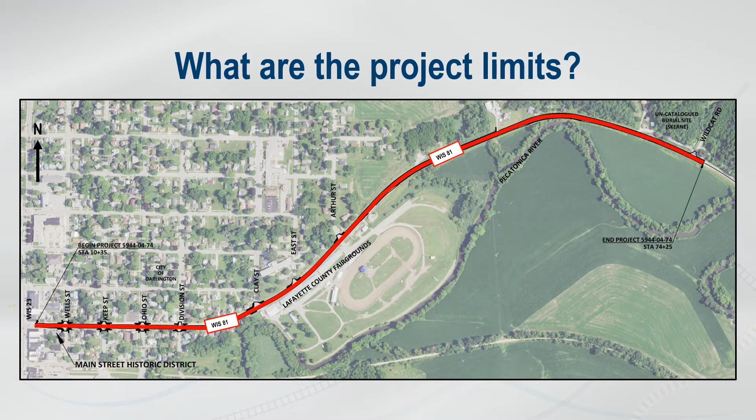The proposed project begins at the Wisconsin Highway 23 and Wisconsin Highway 81 intersection and heads east for 1.2 miles to the Wildcat Road and Wisconsin Highway 81 intersection. The anticipated construction for Wisconsin Highway 81 is currently scheduled to begin in 2026, with possible advancement of 1 or 2 years. During construction, Wisconsin Highway 81 will be open to two-way traffic. Shoulder closures will be needed for pedestrian curb ramp and guardrail improvements.

Milling and paving operations will utilize one lane of traffic in each direction with flaggers. Motorists can expect to encounter flagging operations one city block at a time in the urban portion of the project, and in the rural portion of the project, flagging operations will take place between Arthur Street and Wildcat Road.

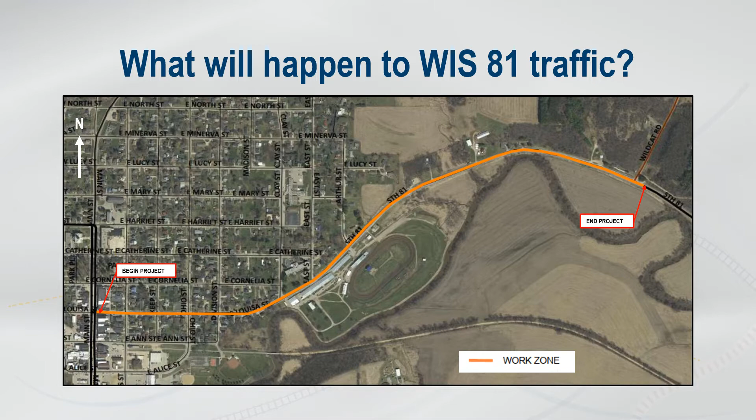There will be short periods of time when construction operations are occurring directly in front of the driveways. During these short periods of time, the property owner will need to park on a side street or use a secondary driveway if they have one. The Wisconsin Department of Transportation will contact homeowners and businesses in advance before closing a driveway.

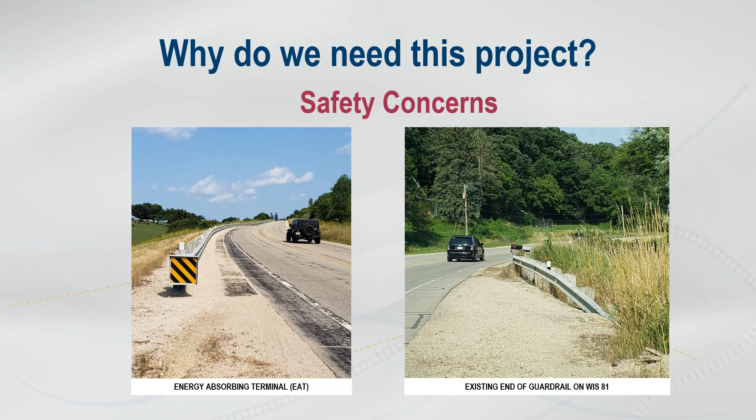Another reason we need the project is the pavement deterioration along Wisconsin Highway 81. The current pavement is deteriorating and has extensive cracking and rutting. Existing shoulder pavement is unraveling, with large chunks of pavement removed in various areas. This pavement deterioration not only looks bad, but also causes Wisconsin Highway 81 to have poor ride quality and presents safety concerns.

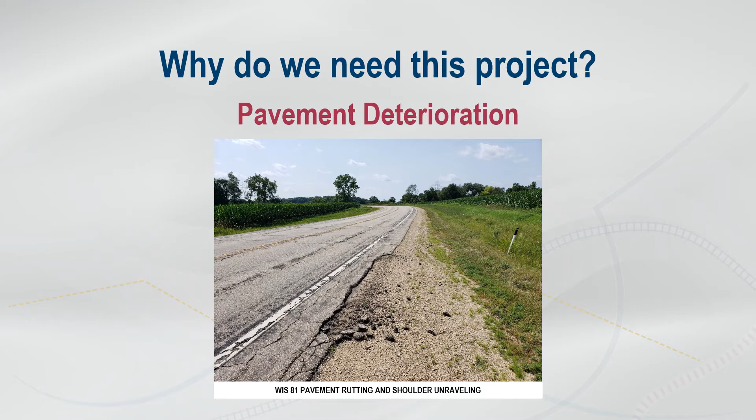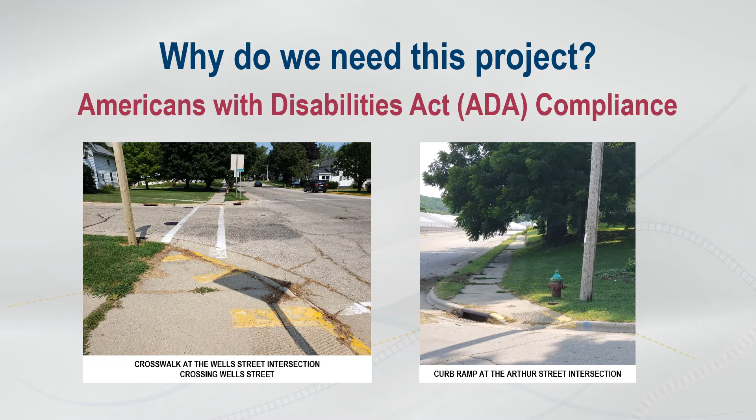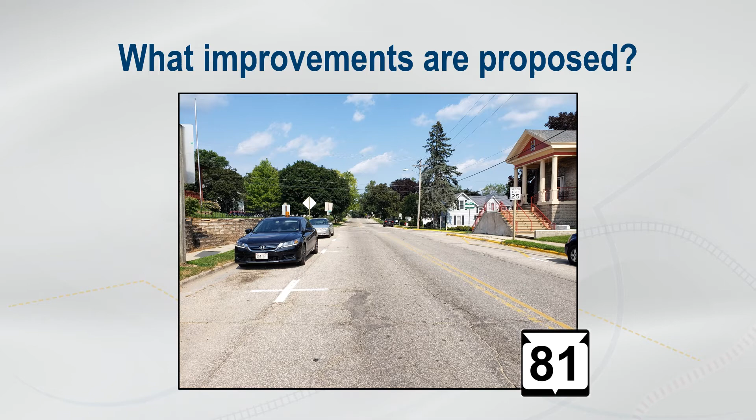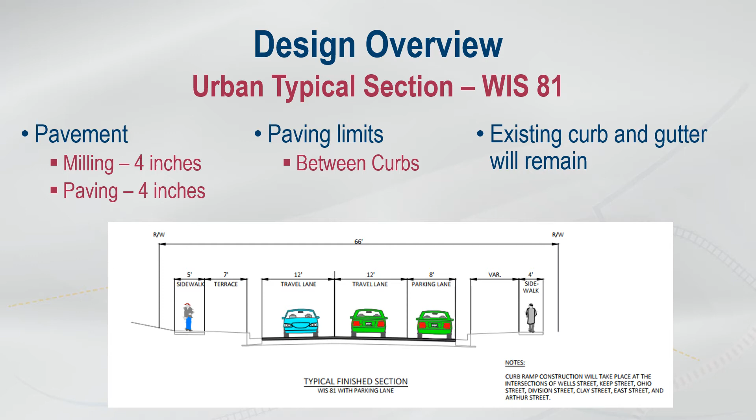The rural sections of Wisconsin Highway 81 are located outside the limits of the city of Darlington and are broken up into roadway with guardrail and roadway without guardrail. In these sections, the pavement will be milled to a depth of 4 inches and paved back with a depth of 4 inches. There will also be new shoulder aggregate and new center line rumble strips.

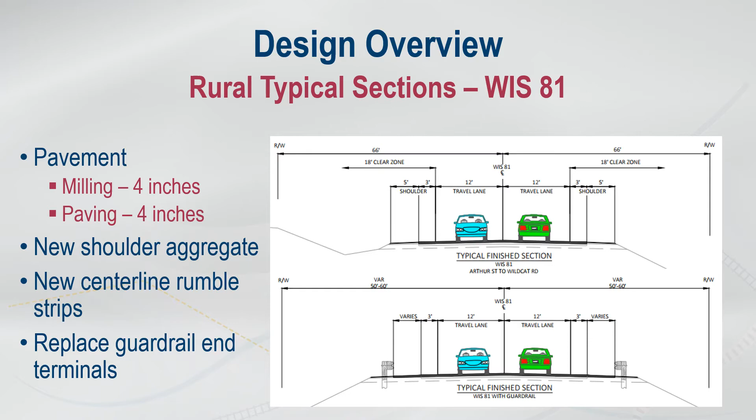Additionally, substandard guardrail and guardrail end terminals will be replaced with safer end terminals called energy absorbing terminals.

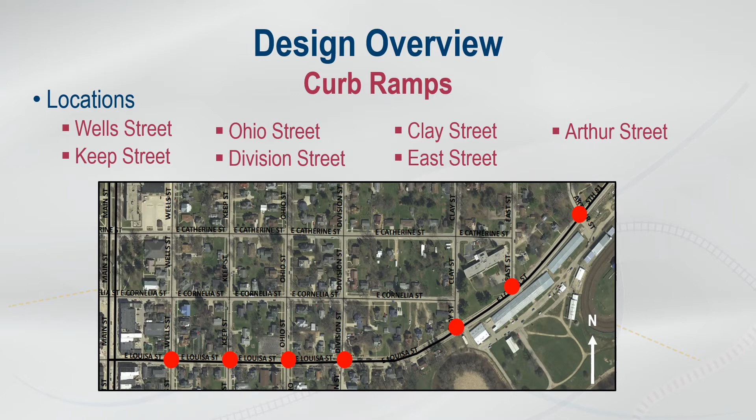Next, I'll discuss the curb ramp improvements along the project. The locations of the curb ramps that are proposed to be improved to meet Americans with Disabilities Act standards to the maximum extent possible are at the following intersections: Wells Street, Keep Street, Ohio Street, Division Street, Clay Street, East Street, and Arthur Street. The curb ramp improvements will also consist of reconfiguring the intersection crosswalks at some locations.

At the Wells Street intersection, the existing curb ramps will be updated to meet current Americans with Disabilities Act standards. Some of the crosswalks will be reconfigured to cross the roadway in a safer location. The red lines show the crosswalk locations that will be relocated.

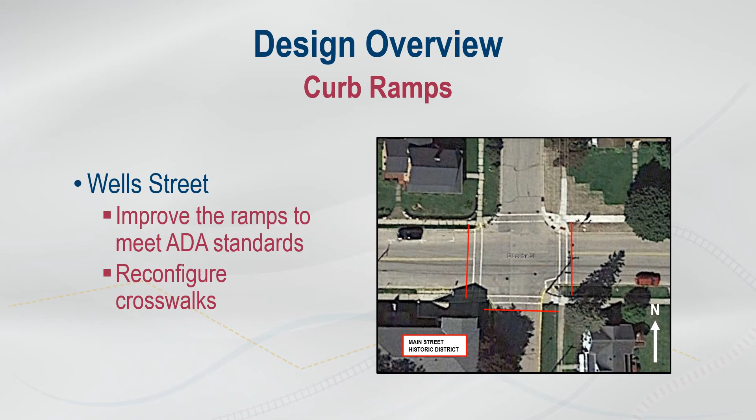The proposed curb ramp construction in the southwest quadrant of the intersection is located within the Main Street Historic District. The curb ramp improvements are anticipated to take place within the existing right-of-way and not adversely affect the historical property.

At the Keep Street intersection, the existing curb ramps will be updated to meet current Americans with Disabilities Act standards. New crosswalks will be installed crossing Wisconsin Highway 81. The red lines show the proposed crosswalk locations.

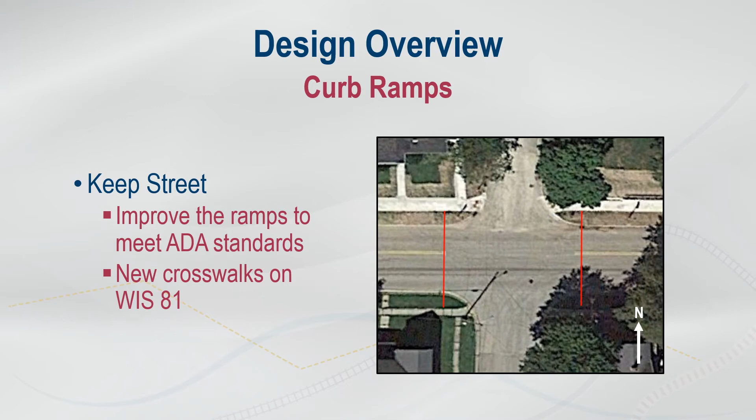At the Ohio Street intersection, the existing curb ramps will be updated to meet current Americans with Disabilities Act standards. Some of the crosswalks will be reconfigured to cross the roadway in a safer location. The red lines show the crosswalk locations that will be relocated.

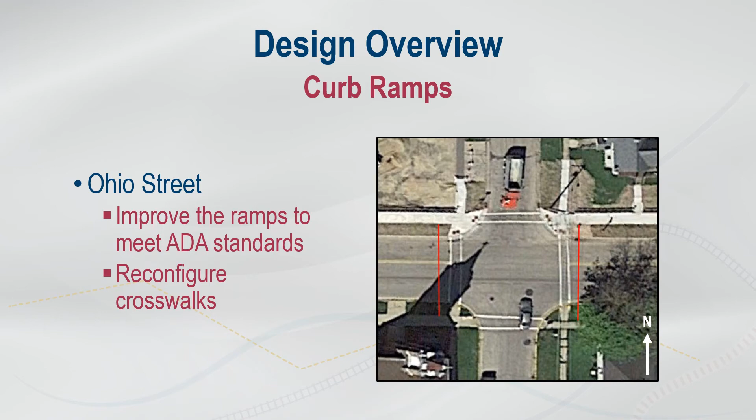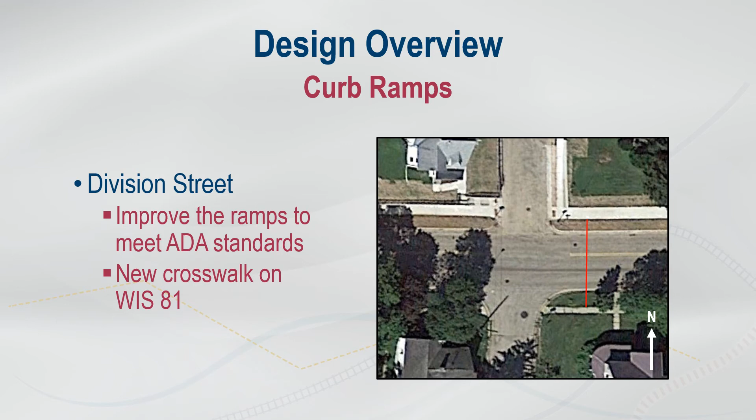At the Division Street intersection, the existing curb ramps will be updated to meet current Americans with Disabilities Act standards. A new crosswalk will be installed crossing Wisconsin Highway 81 on the east side of the intersection. The red line shows the new proposed crosswalk location.

At the Clay Street intersection, the existing curb ramps will be updated to meet current Americans with Disabilities Act standards. The Wisconsin Highway 81 crosswalk on the west side of the intersection will be reconfigured to cross the roadway in a safer location. The red line shows the crosswalk location that will be relocated. The Wisconsin Highway 81 crosswalk on the east side of the intersection will be removed as there is no receiving ADA compliant curb ramp and only a driveway.

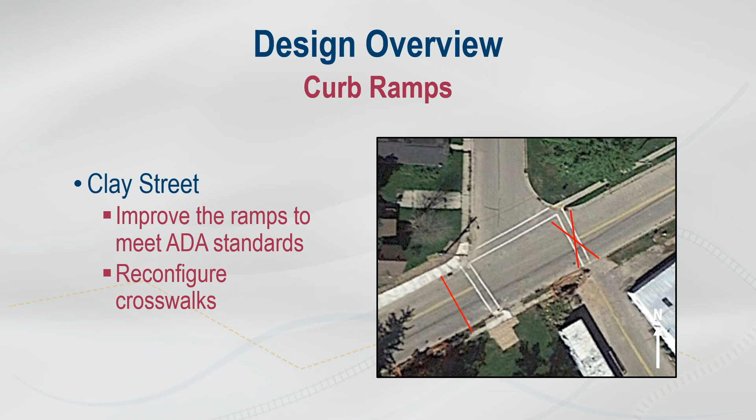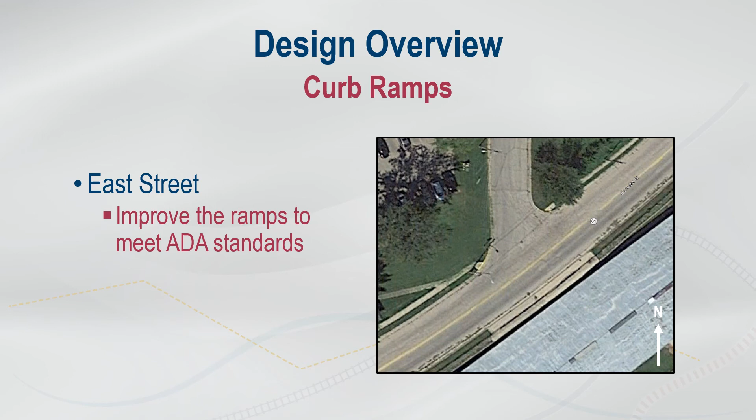At the East Street intersection, the existing curb ramps will be updated to meet current Americans with Disabilities Act standards. Curb ramp locations will be moved closer to the back of curb to minimize impacts and line up across from each other.

At the Arthur Street intersection, the existing curb ramps will be updated to meet current Americans with Disabilities Act standards. This intersection has utilities and storm sewer structures to work around, making the curb ramp improvements challenging.

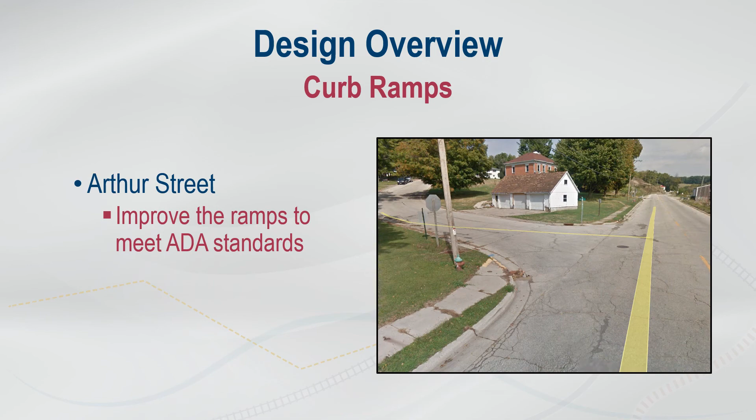What activities have been completed thus far for the project? At the end of 2019, the survey for the project was completed. In 2020, initial coordination letters were sent on January 30th, 2020. Soils testing was completed in April 2020. A Phase 1 historical survey was completed in the city of Darlington, and the draft environmental report was started this spring for the project.

As mentioned, the work on the environmental report has begun, and the report is anticipated to be signed this November. The right-of-way plat is anticipated to be done by May of 2021, and the real estate acquisition will start once the right-of-way plat is complete. Right-of-way is needed at the curb ramp locations and near guardrail construction to blend the slopes, not the entire project. Most of the right-of-way needs include temporary limited easements with some spot locations requiring minimal permanent right-of-way.

The plans for the project are currently scheduled to be finalized by August of 2025, and construction is anticipated to begin the next summer of 2026, with possible advancement of 1 or 2 years.